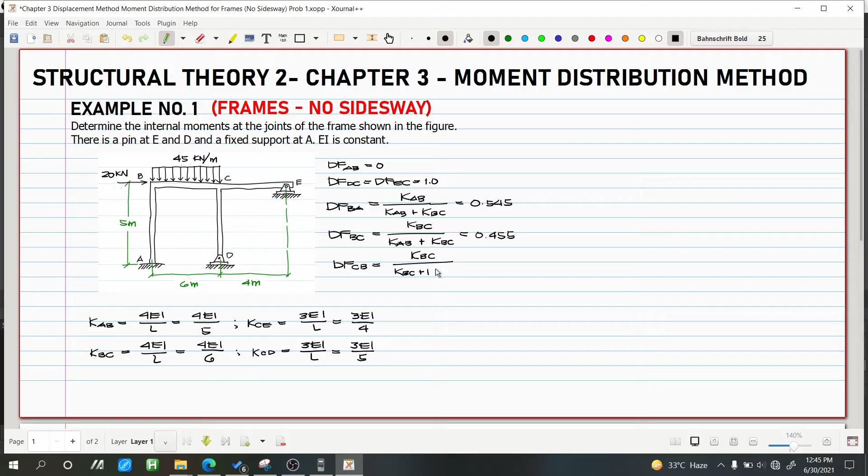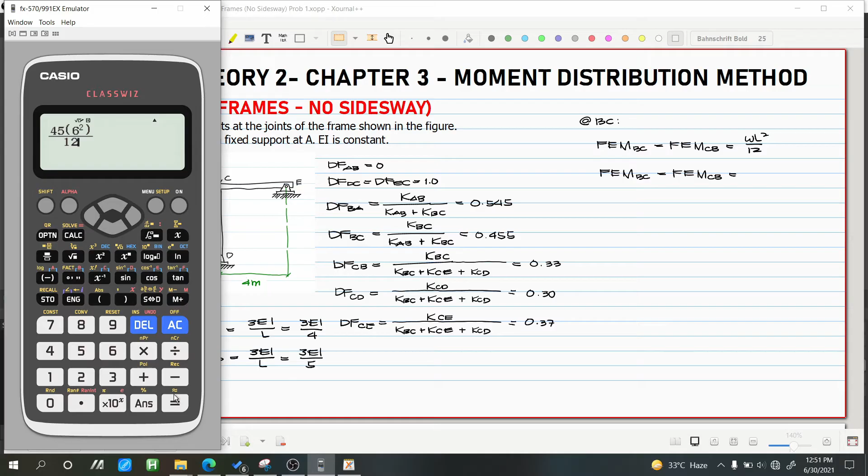So, kilo-newton meter. Itong 135 na ito is counterclockwise sa BC and clockwise sa CB. Meron po tayong 20 kN, ibig sabihin meron po tayong fixed end moment para sa AB. Pero nakalimutan ko lang i-discuss na dapat mag-zero yung FEM dyan, kasi natanong ng estudyante ko kung bakit mag-zero yan. Ito yung explanation, explain natin dito.

Kunwari, ito yung ating AB. This is A, this is B, and this is 20 kN. Ang distance natin is 5 meters.

Ngayon, kung isasolve natin yung reaction natin dito, yung reaction natin sa A is 0. Bakit? Kasi ang magbubuhat ng lahat ng reaction is sa B. So this is also equals 20 kN, kasi andun mismo yung 20 kN eh. Sa madaling salita, hindi na maghahati yung ating A and B, kasi magbubuhat ng lahat niyan ay 20 kN, kasi nakatapat na mismo yung 20 kN natin sa support at B.

Okay, so ngayon meron tayong fixed moment, sabi natin diba? Meron tayong fixed moment para sa AB, and meron rin tayong fixed moment para sa BA. Ngayon, kung mag-moment tayo sa A, okay?

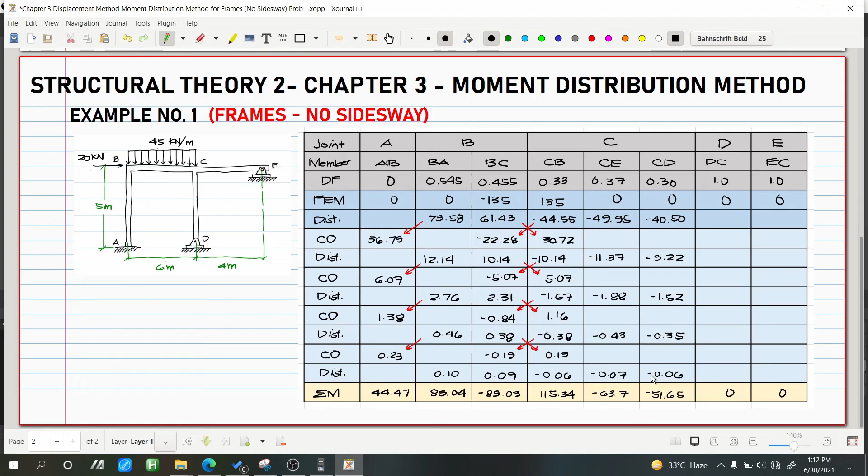So pag pinag-add natin to, dapat equilibrium yung ating moment sa C. So try natin, 115.34 minus 63.7 minus 51.65. Yan, so 0.01, so 0 yung ating moment sa C.

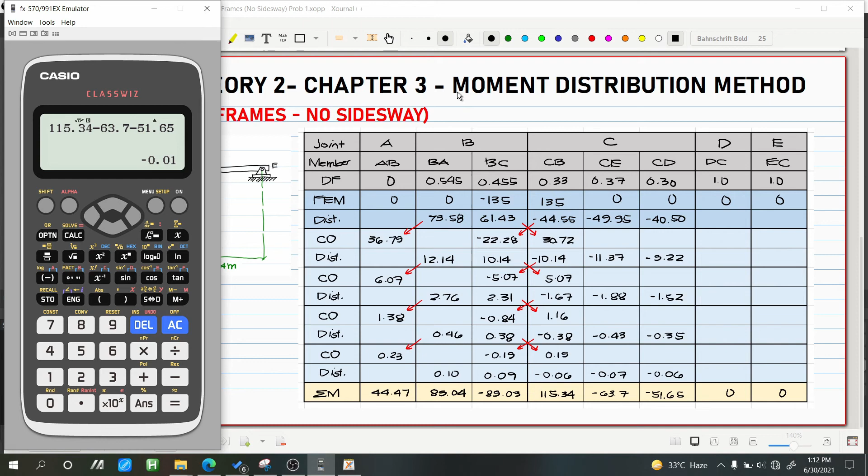Then, yung moment natin sa DC and EC is 0. Ayan, so yan na yung ano natin, yung ating mga moment. So final na yan.

Okay, kasi yung ating balance moment dito is almost 0 na, 0.1, 0.09, 0.06, 0.07, and 0.06. So kapag ano ulit natin yan, kinary over natin yan, mas lilit pa yung ating distributed moment. Okay, so yan. Then try naman natin i-analyze yung mga answer natin.

Okay, lagay natin dito. Yung AB is clockwise daw. Ayan, so try natin palakihin. Kasya pa ba? Ayan, pwede, ayan.

So clockwise daw yung ating MAB. Then yung ating BA is clockwise, ayan, clockwise daw, MBA. Then yung ating BC dapat is counterclockwise. Okay, counterclockwise. Then MCB, clockwise.

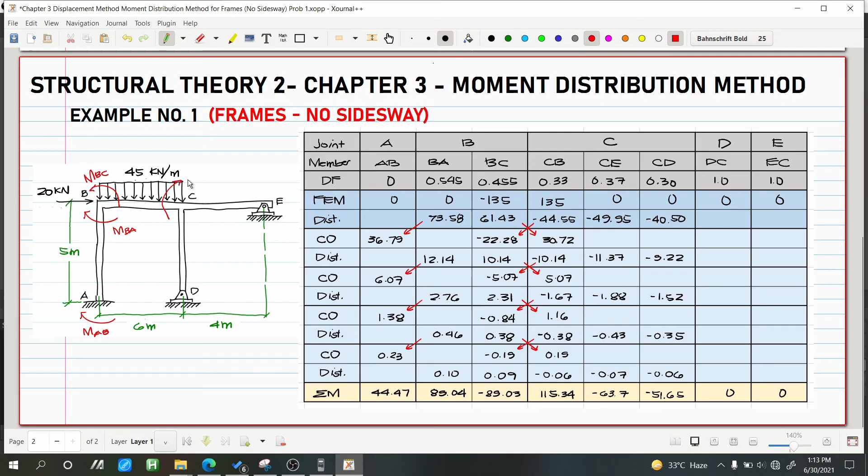Then yung ating CE is counterclockwise para ma-resist yung CB. Then ito rin is counterclockwise yung CD. Okay? Then to 0, 0. Okay, so kung isosolve natin yung ating slope dyan, o parang i-determine lang natin yung sign ng ating slope dyan, makikita natin to.

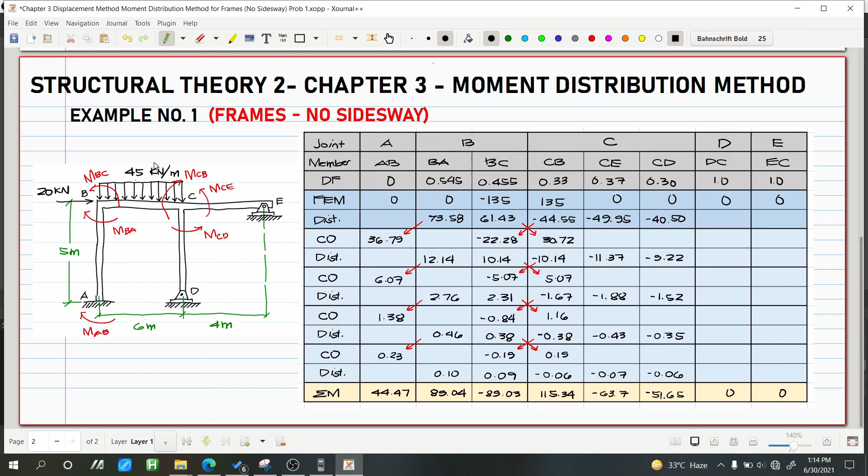Okay, so dito sa BC, yan. Kasi di ba sa BC natin, yung ating 45 kN, magro-rotate siya ng pagganito hindi ba? So zoom lang natin. Yan, so magro-rotate yung ating 45 kN papunta sa BC na pagganyan.

Okay, clockwise. Ibig sabihin, ang magiging rotation ng ating theta B is clockwise din. So magiging positive, okay? Yan. So positive yung ating rotation dito.

Yan, so positive theta B. Okay? Then kung positive yan, doon rin sa vertical niya, o sa vertical member niya. Kasi ito ay fix, okay? Kung fix yan, parehas lang sila ng rotation. Okay, so ito rin yan is positive or clockwise rotation na slope.

Okay, so theta B. Okay, so sa naman, sa C, ang magkakos ng rotation dyan is, syempre, yung pa rin, 45 kN, ang gaganyan yan, hindi ba? So sabihin, ang ikot nun is counterclockwise. So kung counterclockwise yun, yung ating theta C is magiging counterclockwise din. Ibig sabihin, negative. Ayan, so ito yung theta C natin.

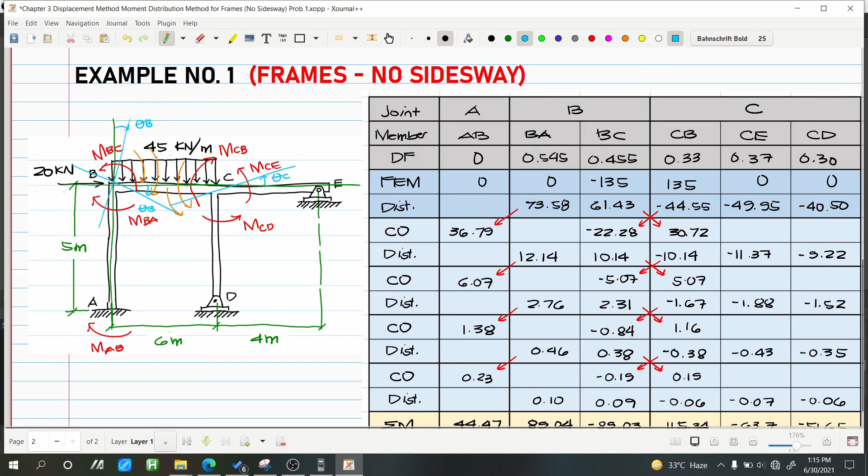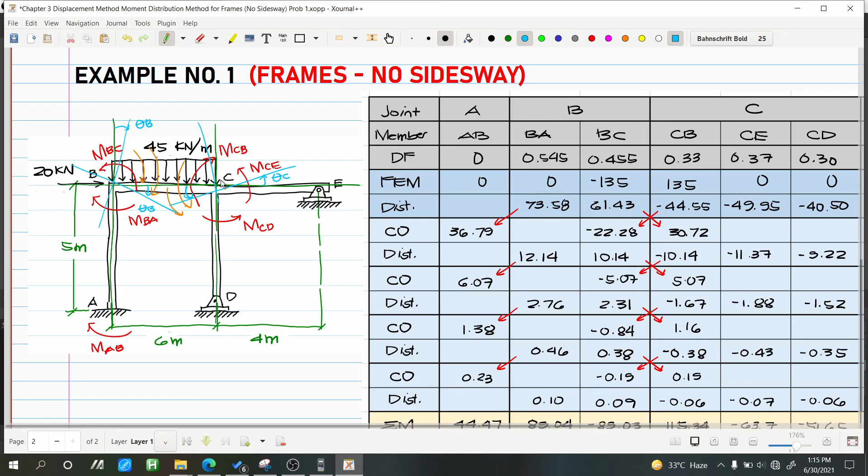So negative. So dito naman, gaganyan yan. Okay? Then kung titignan na rin natin sa vertical member niya, yung CD, kung ito is counterclockwise, so counterclockwise rin to. Okay, yan. So ikot siya ng ganyan, counterclockwise. Ganito, counterclockwise. Ito naman, clockwise. Okay, ayan, yan, ito na yung natin.

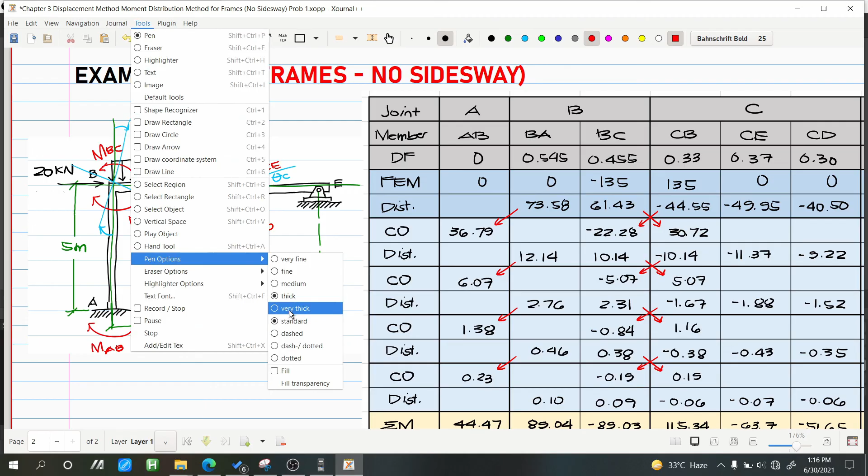Mga slope natin. Then madodrawing na natin yung ating elastic curve. Yan, okay? So ito yan. Actually, kapag tinignan nyo yung nito, moment diagram, may negative pa rito, may negative pa rito.

Gaganyan siya, okay? Gaganyan siya. Yan, then ganyan, okay? Then magpa-positive. Okay? So kung tuloy-tuloy natin drawing, pag ganito siya. Negative, positive, then negative. Yan. Then ito, negative rin.

Okay, so tuloy-tuloy ito. Negative na pa ganyan. Okay, yan, okay. Then ito naman, magro-rotate ito ng pag ganito. Then sasara siya pag ganyan. Okay, then ito, pag ganito.

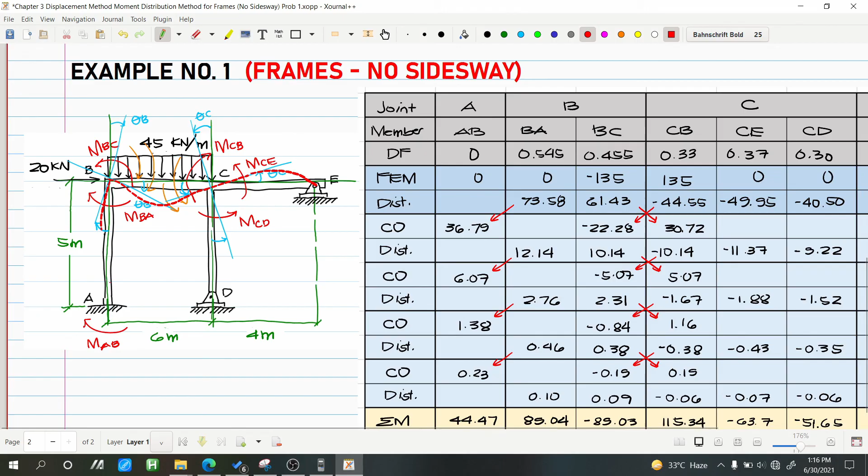Tuloy-tuloy ito, kasi pin to, so ito double check natin sa moment diagram dun sa book. So tama to. Negative dito sa part ng BA. Then positive naman dito sa part ng AB. Ayan, positive siya. Okay? Then sa CD, positive moment. Okay? So positive moment, ayan, naka-smile.

Okay, so dito naman, sa BC, may negative tayo rito. Ito, then negative, then positive. Ayan. Then dito naman sa CE, lahat yan is negative. Kaya pa ganyan siya. Okay, so yan.

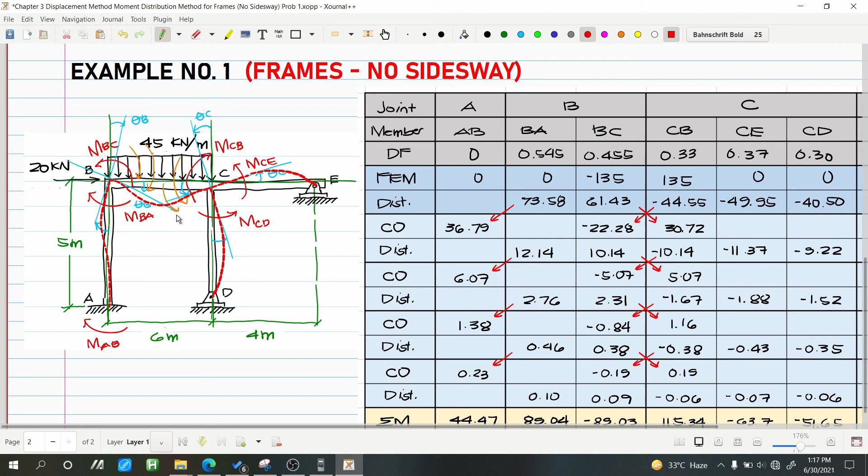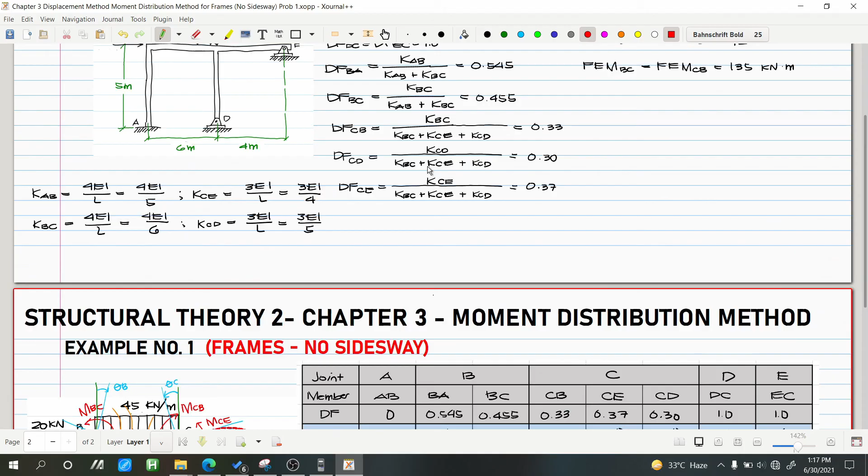Tugma pa rin doon sa ating mga moment, and tugma pa rin doon sa mga slope. Okay? Ayan, so this is our example number 1 for frame analysis with no sidesway under moment distribution method.